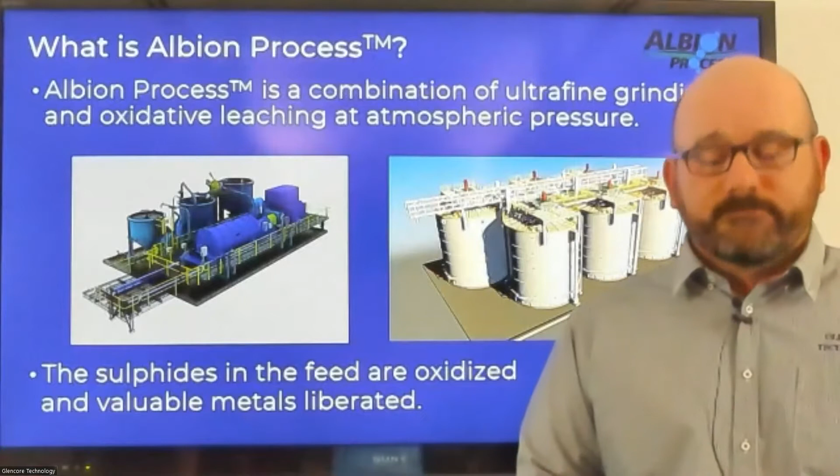So what do we look at to develop the Albion process for your project? Initially you go through, do some drill holes, get some cores, and find that you've got some gold. Then you look at whether that gold is recoverable by typical cyanide leaching, or is it refractory? We're concentrating on refractory gold and trying to assist with recovering that.

So what constitutes the value of that? We're looking at how much gold is in there compared to how much sulfide we would need to oxidize to recover that gold and give you the value. If the gold to sulfide ratio is really low, there's perhaps an opportunity to upgrade the concentrate using flotation.

Glencore Technology has their Jameson cell, which has great flotation efficiency, and can supply either single cells or a full concentrator. For the Albion process, we're looking at a minimum of 10% sulfide, which allows the oxidative leach to run autothermally, giving us maximum benefit and good recovery.

For us to evaluate your project, if you get in contact with Glencore Technology, we can send you the Albion Process data sheet. We're looking for key pieces of information: the gold grades, sulfide grades, and other mineralogy so that we can get an idea of what is in your ore body.

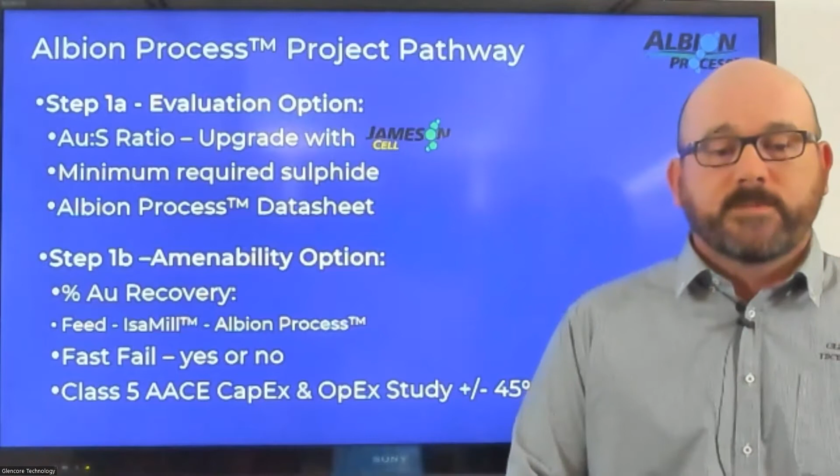Moving forward, it really depends on your company and your whole capital management framework, and what you require to progress your projects. For that, we're really flexible and want to work with you to develop the right way and ensure your project goes forward and meets your requirements.

But if it follows a typical pathway, the next stage is really the PFS or a class 4 engineering study. For that, we do a step up in test work so we can get a really good understanding of the sizing of the project for both the IsaMill and the Albion leach process. That involves basically signature plot and kinetic test work, which Sarah will take you through the details of later.

From that, realistically we're at a stage where we can guarantee our design for scale up from the bench scale to the full scale operation, and can offer process guarantees on that test work. That's really what drives the fact that we can get the accuracy down for our PFS. For the CapEx and OpEx, we can either look at supplying package prices into your engineering company if you're using one, or look at a full process CapEx for the whole of the Albion process.

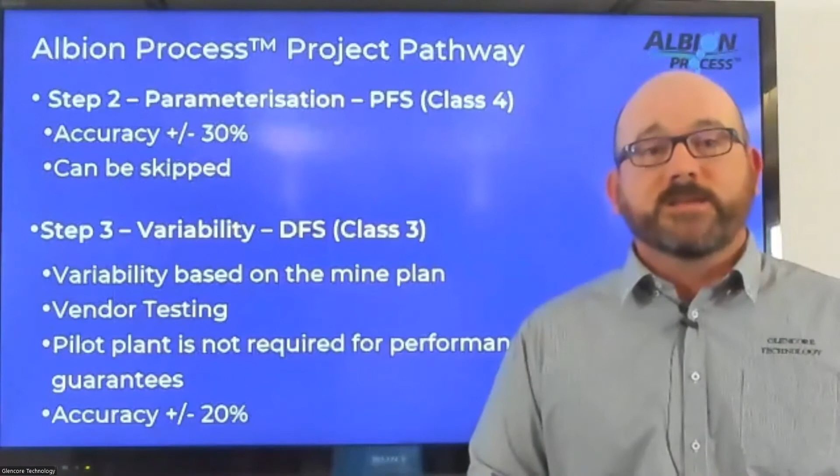I'd now like to hand over to Kel, oh sorry, I missed one.

In the execution phase, really what I talked about was the flexible design support - the Albion package of the oxidative leach reactors and the IsaMill package. We also then look to come to site for construction and commissioning support. Depending on the supply, we can also look at doing that front end process design to help assist sizing the other parts around the plant, and supply that information into your engineering team to do the execution and construction work.

Now I'd just like to pass on to Kel, who's going to take us through the online calculator. It's in development. Thank you.

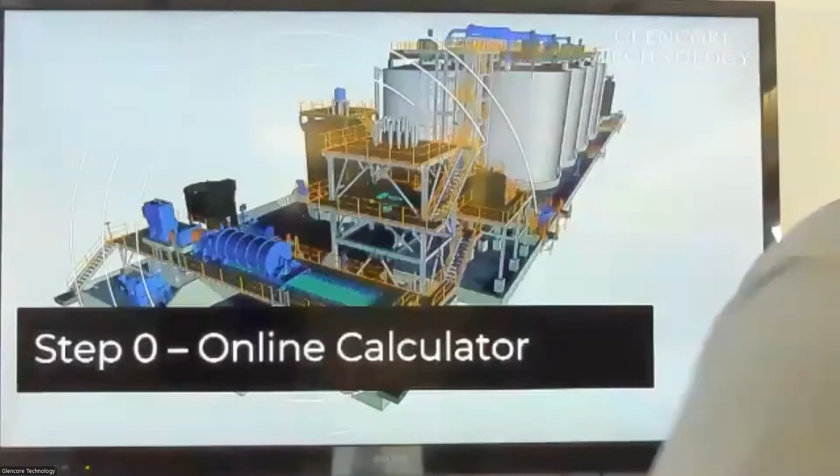Thanks for that, Paul. So now that Paul's gone through the different steps, I'm going to show you a step 0, as we like to call it. This is our online calculator, specifically looking at the refractory gold Albion plant. This is not currently live on our website, so don't try to find it right now because it's not there, but it will go live very soon. We will send that out on LinkedIn when that happens. So what is the online calculator?

The whole idea is it's completely free. You get an order of magnitude CapEx, a mechanical equipment list, an order of magnitude OpEx, rough staffing requirements, power requirements, and the oxygen and reagent requirements of a refractory gold Albion plant, completely for free online at the touch of your fingertips whenever you desire it.

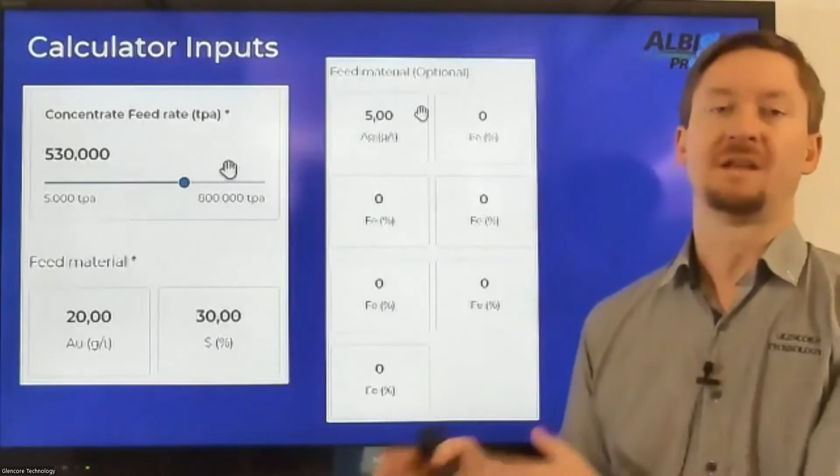These are work in progress images, this is from the mobile version. There's also a desktop version, as you'd expect. The only information you need to give us is your feed rate in concentrate tons per annum, your gold grade, and your sulfur grade. That's the only information you need to know in order to get all that information from us for free. You'd simply jump on and say roughly, this is my feed rate, how many grams per ton of gold I have, and what my sulfur grade is.

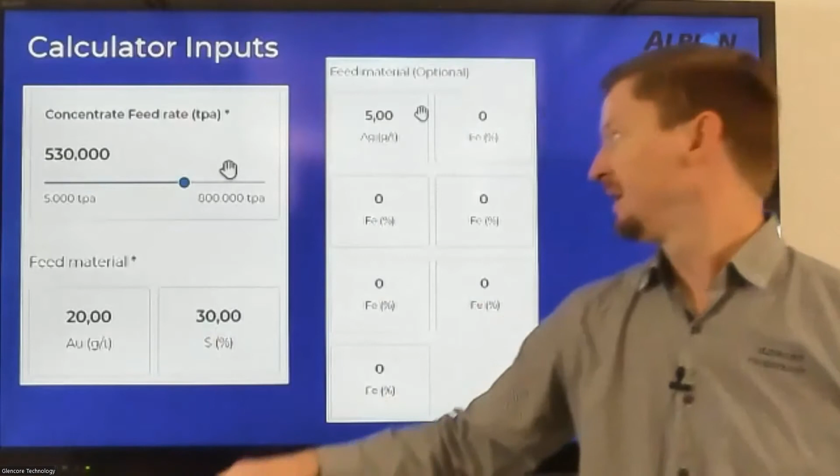Ideally you'll already know all this. You can then give us all the other information if it's a polymetallic ore body, as Paul was saying, if there's some copper in there, if there's some iron in there. You don't need to know this information, but it will help.

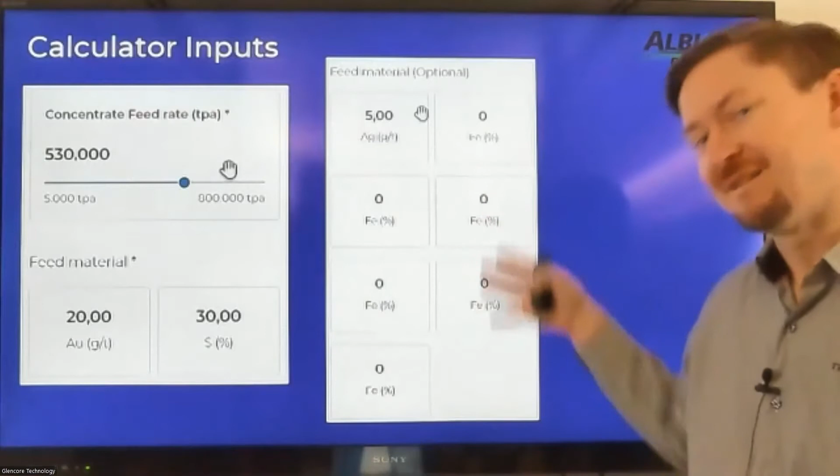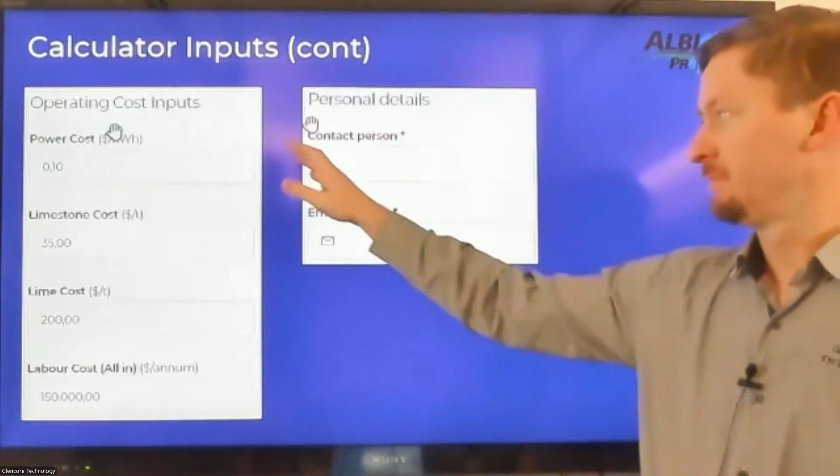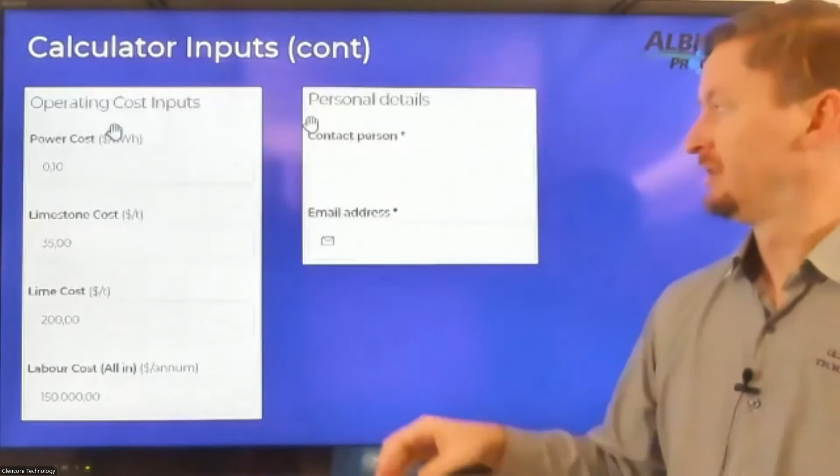All right, so the next one, these are your operating costs. If you know your operating costs, punch these in here, that'll give us a lot more information - a lot more accurate OpEx cost for the Albion. If you don't know them, or don't want to tell us for whatever reason, those numbers you see on the screen will already be populated, and we've used them as our default based on our experience of what you'd expect to pay.

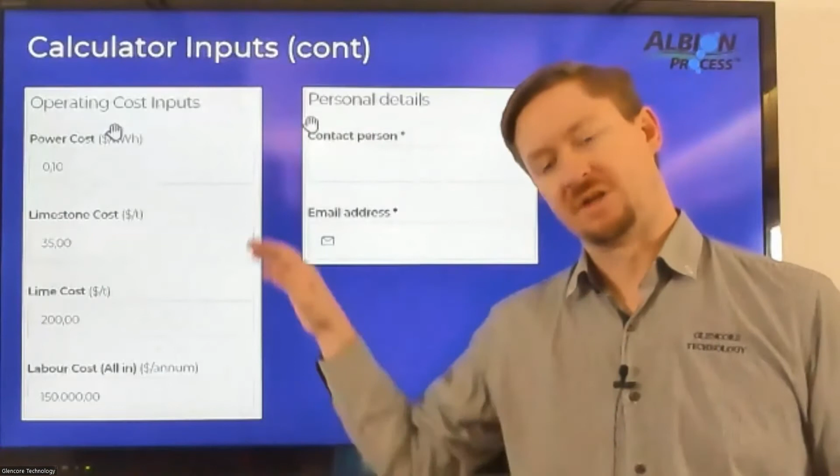Then you just tell us who you are and what your email address is. That's simply to get the report, and you will need to give us that.

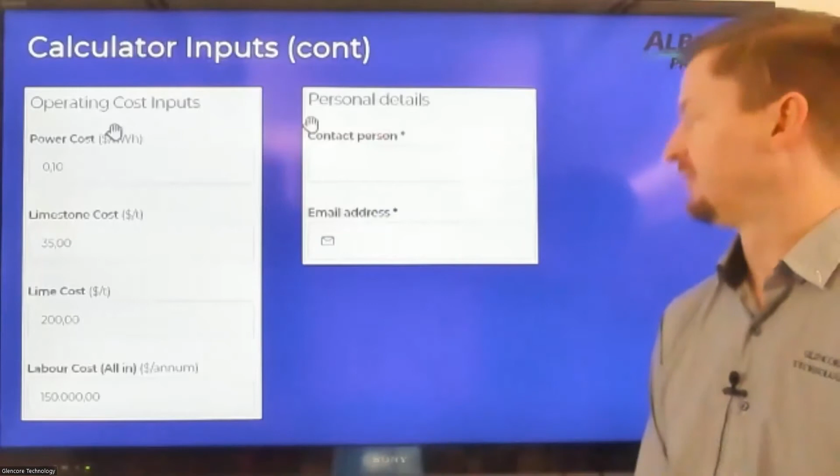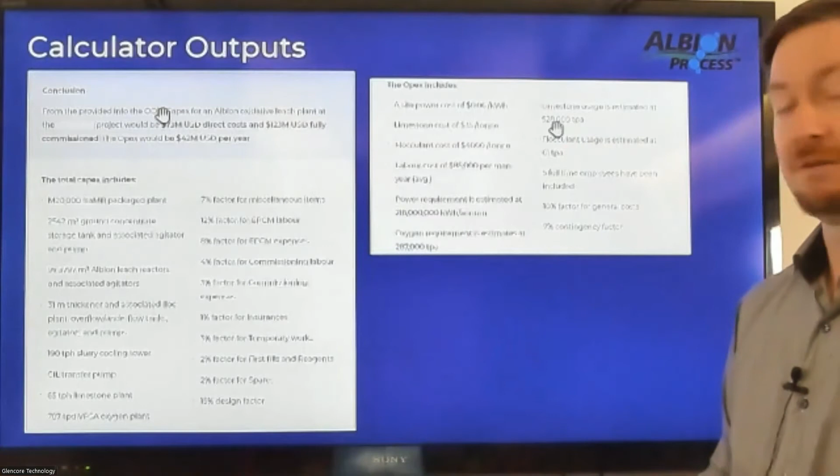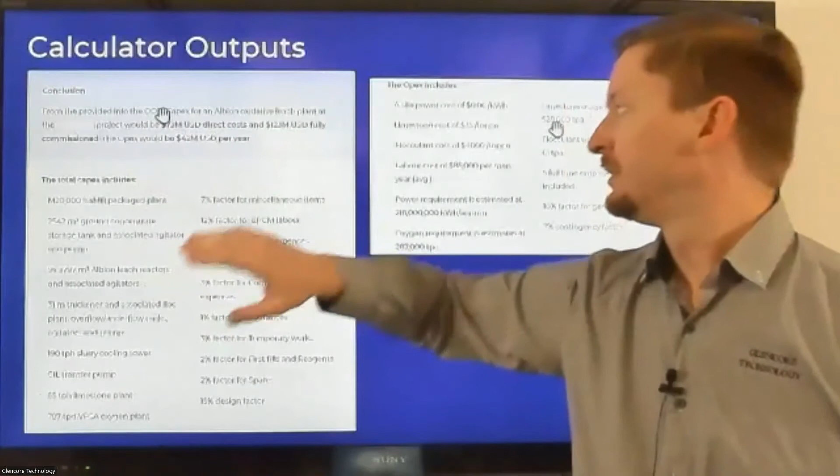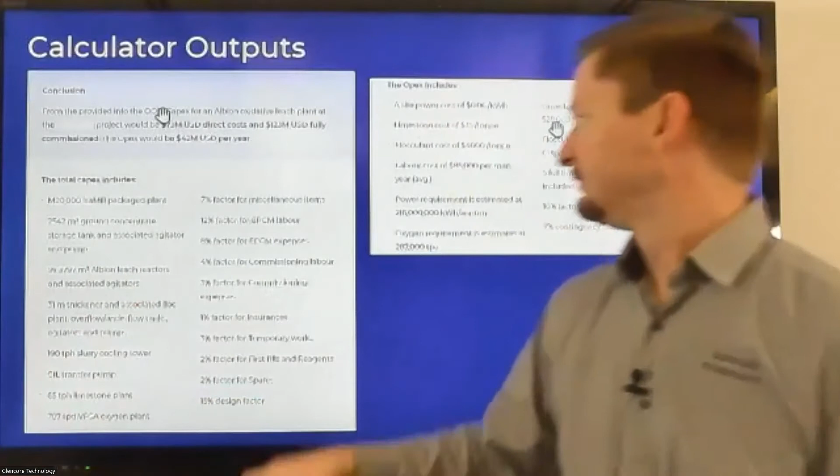So what do you get? You will get this very funky report full of lots of really interesting information, again all for free. It'll tell you your direct costs for materials, your commissioning costs, and your OpEx, all in US dollars. Then that'll include our MEL, mechanical equipment list, with all the different materials and equipment you'll get as part of your Albion plant. It'll then tell you all the different factors we've included, so you can talk to us and say, hey, in my part of the world I think that's wrong, or I need to adjust that, etc.

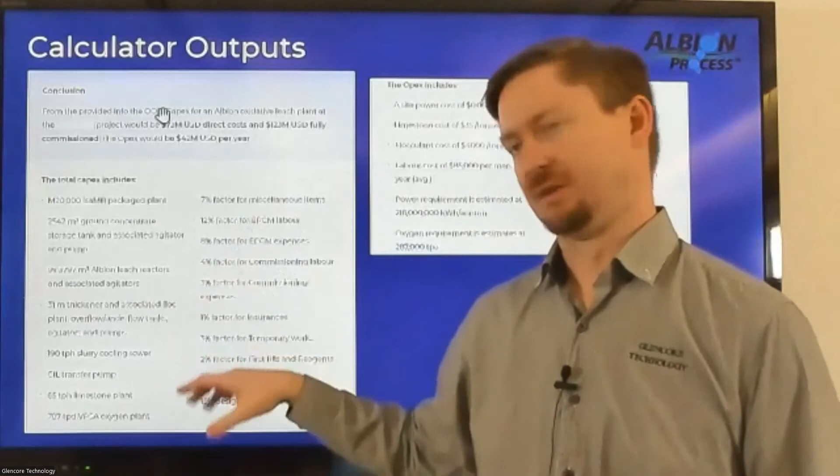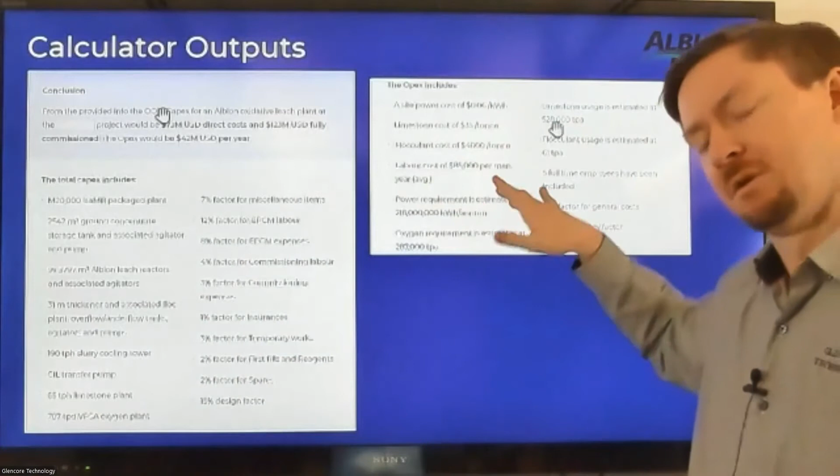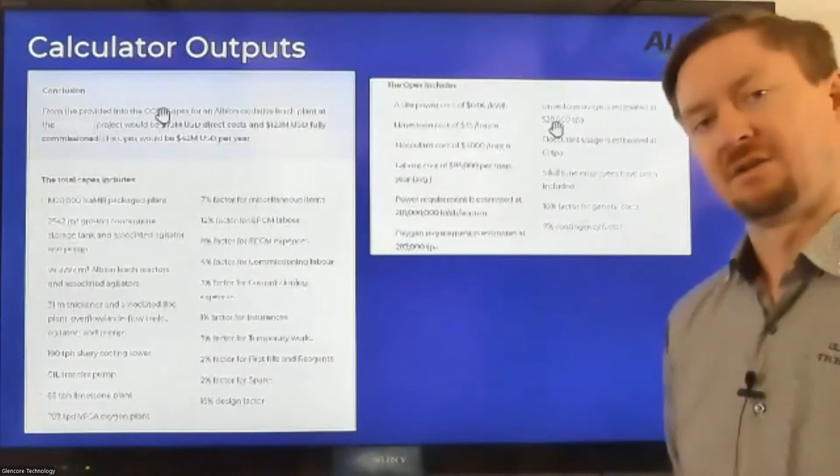You'll then get an OpEx that will tell you your power costs, limestone costs, flocculant costs, labor - all those things you've given us or that we've put in for you. That'll then tell you all your reagent usage, employee numbers, factors, everything you need to know to look at the Albion process for free in your own time and ask: is this something I want to look at further? Will this work for me, will it work for my project economically? That then forms the basis of the conversation between us when you come to us and say, I'm looking at the Albion process, I would like to know more.

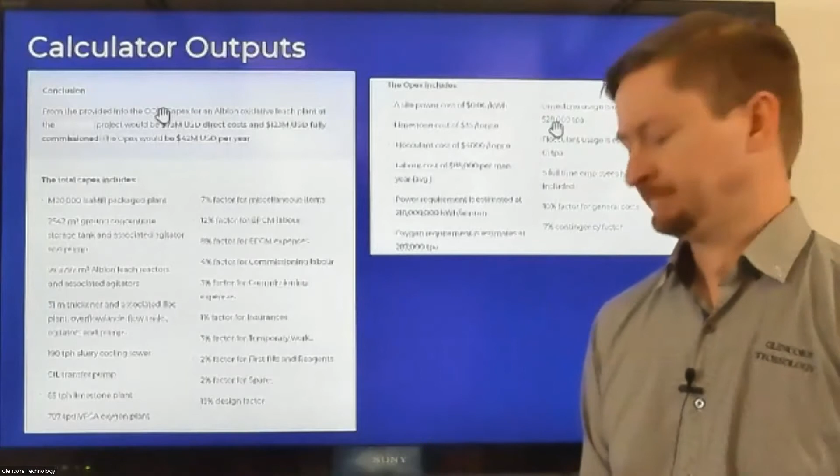So, short and sweet for me. I'm going to pass over to Sarah now to go through the stages of test work.

Thanks, Cal. I'll be going through our test work phases with you. This is a journey that accompanies our engineering studies. At the different phases of the engineering studies, we recommend you look at the test work in different levels of detail. At the outset, we deal with 3 accredited labs, because we want to ensure the tests are conducted correctly and we can trust the results and use them for process guarantees.

To jump into the phases: the first phase, which usually accompanies a class 5 or concept level study, is an amenability test. The objective is to work out whether the Albion process is amenable to your ore. The test is designed to fail fast, meaning we remove all barriers such as grind size and residence time. This stops you, the client, from wasting time on a process that might not be suitable for your ore.

We run this test at a grind size of 8 microns and 72 hours. If the test fails - meaning you do not get a good gold recovery on the Albion leach residue CIL test - then we know there's something in the properties of your ore that doesn't make it amenable to the Albion process. An example would be that the gold is not actually hosted in sulfides, so the Albion process doesn't open the sulfide matrix and make the ore more amenable to CIL.

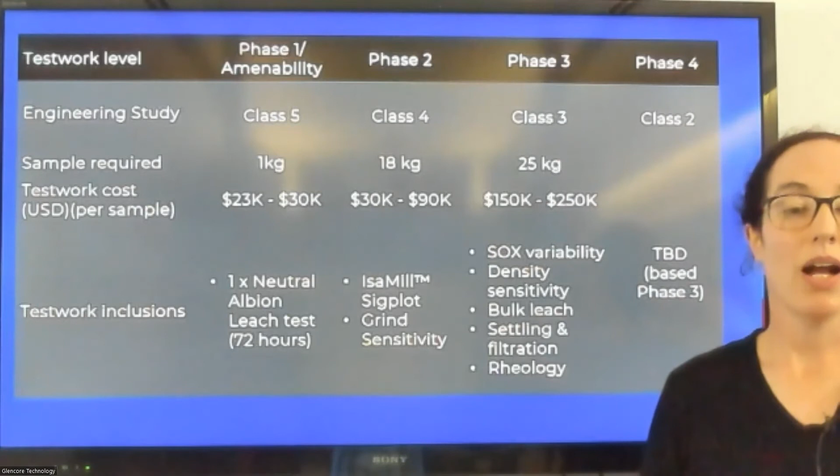When you look at what's included, we've put the test work inclusions here. This is there for you to take home and consider more deeply.

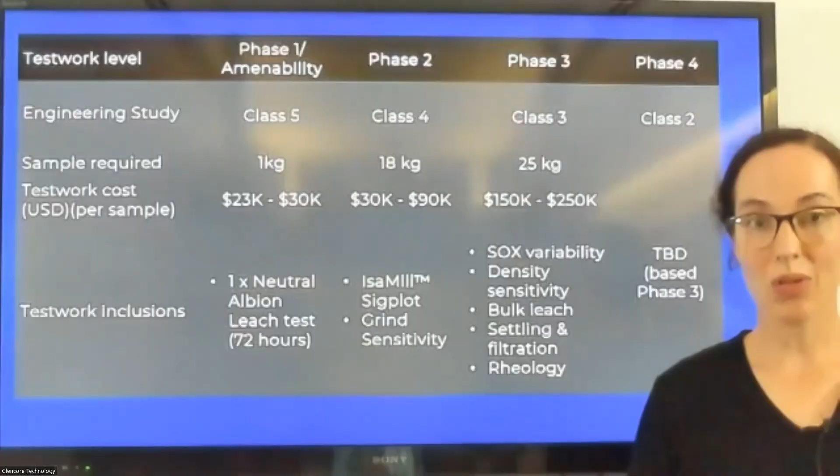I will now pass on to Paul, who will go through a 3D model. Thanks. Thank you, Sarah.

So yeah, I guess we just wanted to walk you through one of our example 3D models that's been taken from our Class 3, so feasibility study engineering. So really the capabilities that we have here at Glencore Technology to support you on your projects. Obviously we have a very strong process team, all of us working as that, and we also have very strong mechanical and drafting capabilities.

Basically, we use a partner for electrical and instrumentation type services, and that helps to put together our Albion process designs.

This was for a gold project, but this particular gold project also had associated base metals, so that increases the complexity of the project and also of the plant, because then we're looking to take those base metals into solution and then actually produce them as intermediate hydroxide products, so that we can filter them off and sell those, as well as recovering the gold in the downstream portion.

So skipping forward to the photo, here we can see the IsaMill at the front of the plant. For that, as Sarah was saying, we had to do the signature plot, which basically gives you the kilowatt hours per ton that you need for that ore.

The grind sensitivity, as Sarah says, is very important because it's an exponential curve as you go down in size versus the actual energy, really looking at that optimum position.

If you can keep that energy requirement down, obviously you can run through the IsaMill as a single pass, due to the really good classification that happens internal to the IsaMill. If it's a high energy demand, then we actually have to run in closed circuit with cyclones, as is in this plant. So basically running as a typical classification circuit around the IsaMill.

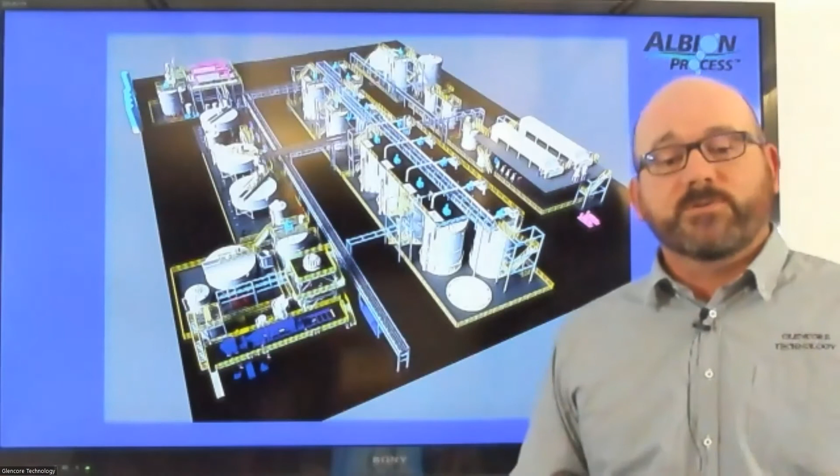The IsaMill, obviously, there's a very large range of sizes from the M1000 to M50,000. So really we're looking at up to 8 megawatts of power per mill, so a very good range of throughputs that we can do through a single IsaMill.

So then from the IsaMill, basically we go into a concentrate feed tank, which is feeding into the first 3 of the Albion process tanks. This allows you to bypass the first tank if there's an issue, and still maintain the operating circuit.

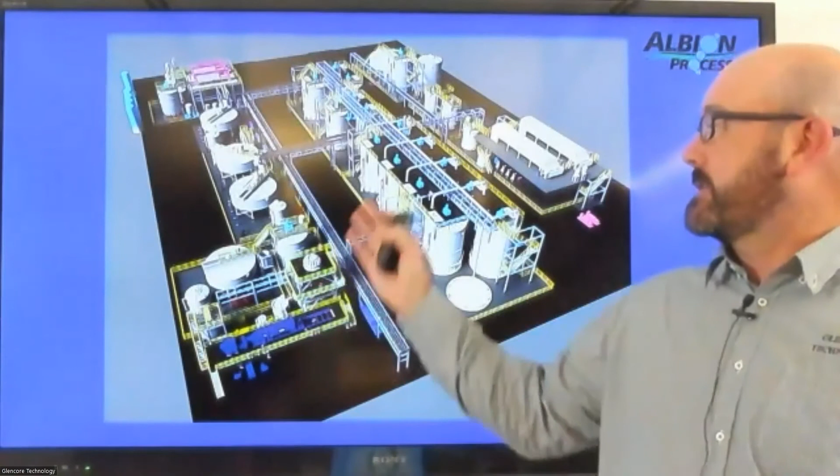So for this, we have 6 tanks that are running under acid Albion conditions to liberate the base metals. That's basically running at a free acid of about 10 or 15 gram per litre, and allowing them to come out. And then basically straight from there, it's going into 3 iron neutralisation tanks.

So lifting the pH up to 3.5 to drop out the iron and aluminium prior to going to solid liquid separation. So then taking the PLS out for our base metals, and then taking the residue from that and taking it forward.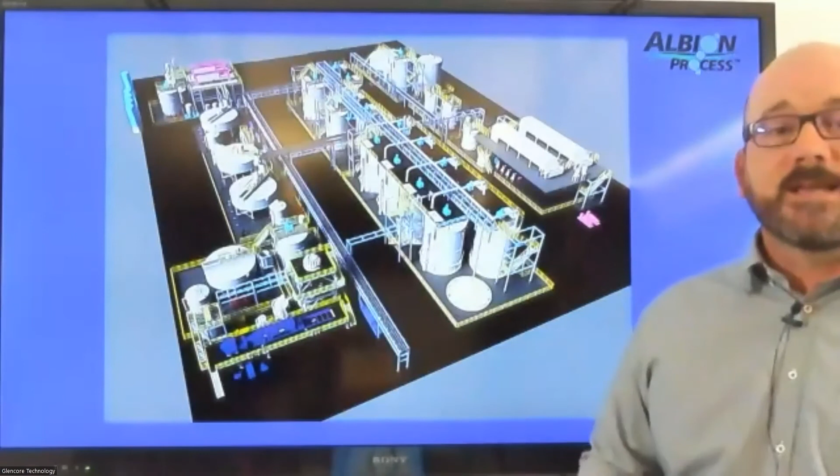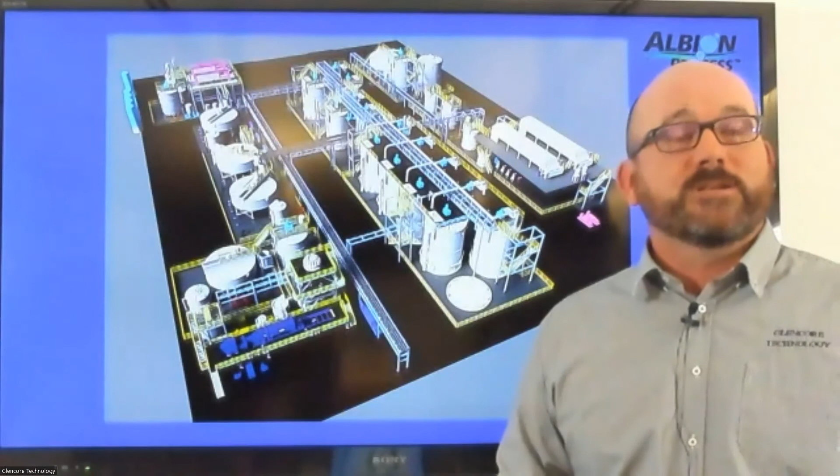Basically, we're going here into a lime boil in this circuit using another Albion leach reactor, elevating the pH up to pH 10 to run the lime boil, because it was found that, in this case, it assisted in the gold recovery downstream. And I guess it also, because it's already elevated the pH, saves those costs down in the gold plant, and there was also a reduction in cyanide for that.

So I guess that solid liquid separation happens first by thickening, and then basically running these two belt filters there to get that wash efficiency to ensure that we're not losing any of those base metals.

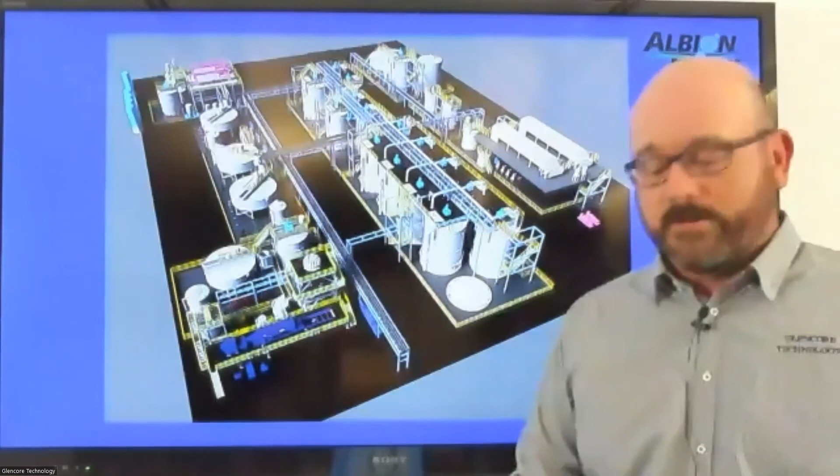I think if we move forward, that's just the view from the other end of the plant. So obviously, down in this part of the plant here, we have two base metals recovery circuits.

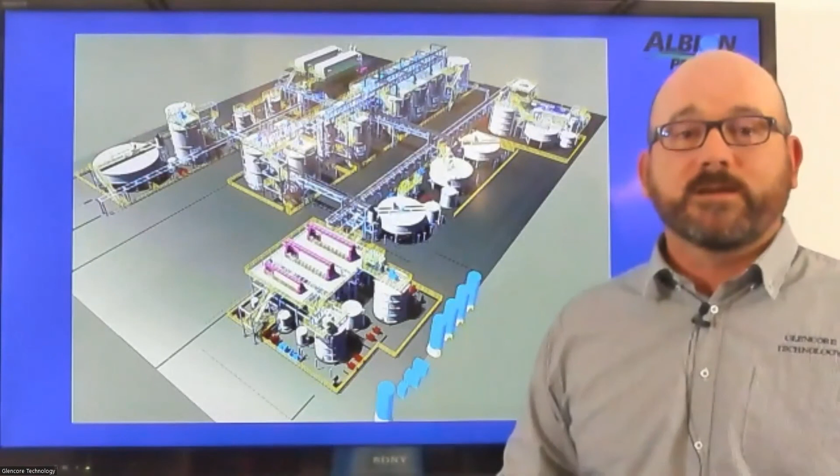So what they entail is a number of precipitation reactors. So here we're precipitating out with the lime to make a hydroxide, and then going through thickening and filtration to make a filtered powder product that they can then bag and sell.

So that means we have this information, so when you come to us, we can get really accurate pricing and a really good understanding of what is required inside that reactor, not only for our studies and to give good pricing in that, but also to give accurate pricing coming into our proposals at both the fixed and non-fixed end. Obviously, we would go out to price on our subcontractors, but it maintains really accurate pricing for our studies.

Obviously, the key part for our leach reactor design comes down to the test work we've done. We've done the kinetic work, so therefore we can actually work out the mineral rate constant, because the leach reactor is designed such that the agitator input power ensures the oxygen diffusion is not limiting the leaching of the mineral, along with the power that's inserted through our oxygen sparge, the HyperSparge. So therefore we can get that rate constant, which typically for pyrite and chalcopyrite is a first order rate constant.